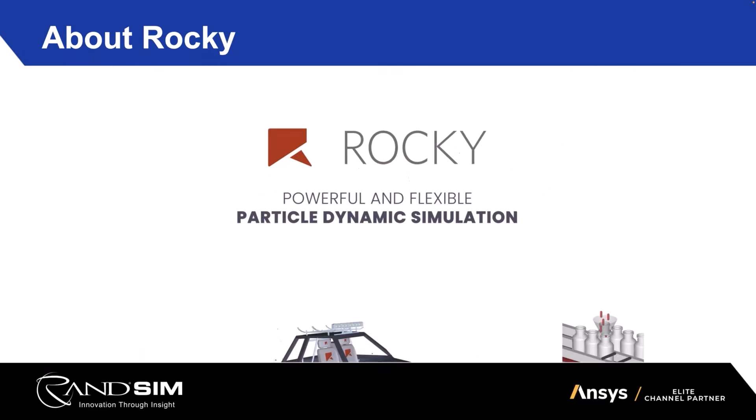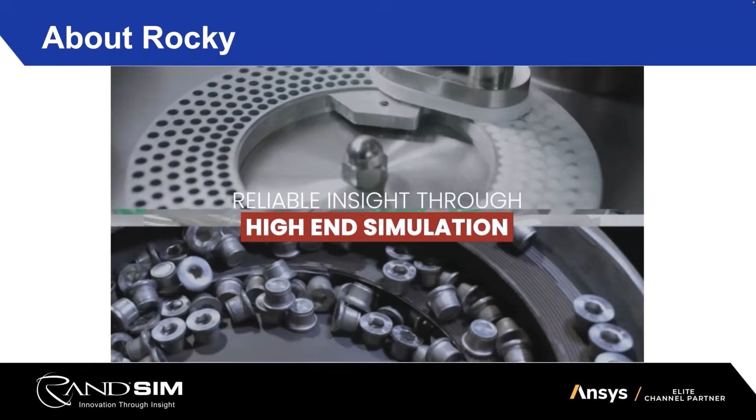Here it is. Particles are everywhere. Design and operation of engineered mechanical systems require accounting of particle dynamics. Particle simulation is key in developing high-quality products while meeting cost, performance, and sustainability concerns. Meet Rocky, the software that is delivering critical process insight for solid handling systems in multiple industries. No matter your industry, use Rocky to accelerate your product development processes.

So in a nutshell, the message we want to convey in this introductory part is that particles are everywhere, and you get impressed by the amount of applications and industries we are touching today, helping model many different problems connected to fluid dynamics, traditional structural mechanics analysis, or electromagnetics, but with more detail as far as particle representation is concerned.

Problems involving different particle shapes, interaction with fluids. For example, on the top left corner, you can see particles coating, like drugs, on agriculture, on healthcare, on floor care, for example a vacuum cleaner, or fluidization, bottling or packaging machines, scrubbers for cleaning rough surfaces, and the list goes on.

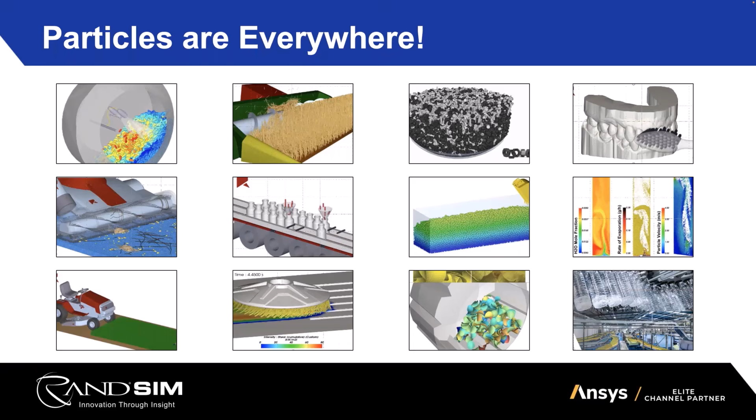So in theory, a lot can be modeled using a discrete tool like Rocky, through what we call particles. But I'm going to get into more detail here to explain how we do that, and how we consider ourselves leaders in this segment.

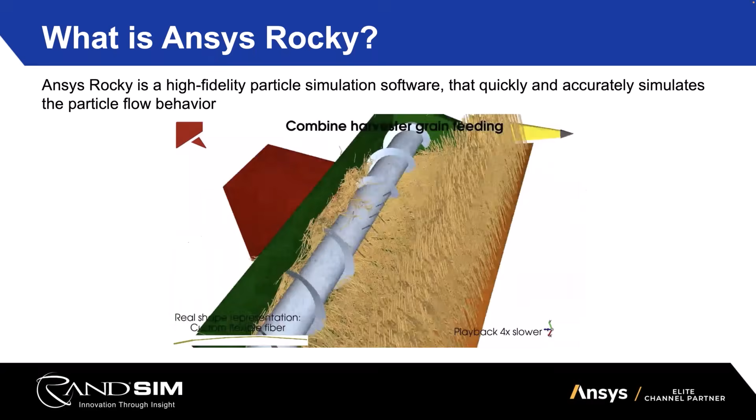Rocky is a high fidelity simulation software that captures and accurately represents particle flow behavior. Here you can see the boundaries of this harvester, but all the grains coming through these feeders, the cutting process, the harvesting process itself are modeled as discrete elements.

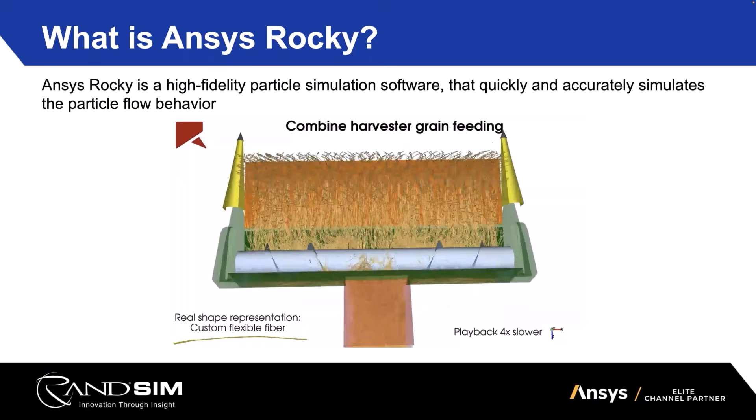Discrete, solid, but not rigid. They can be flexible, they can be three-dimensional. We can handle a lot of them altogether. This is an example of our fiber model, which is like a 1D element with flexibility within each joint.

And we are touching a lot of sectors, from consumer products, agriculture, mining, mineral, food and beverage. These were the traditional ones, but more recently we're moving into batteries, additive manufacturing, renewables or green, and all these environmental issues—they're all related to particle modeling somehow.

If you talk about batteries, for example, we discuss a lot about solid state batteries, which is all about handling material, compressing them, compacting them, and the way you produce and store the energy is related to the compaction, to the density of the material.

So it's all about handling material, and the way you produce it is actually very related to how you're going to finish the life of the equipment—how easy it's going to be to recycle that or not.

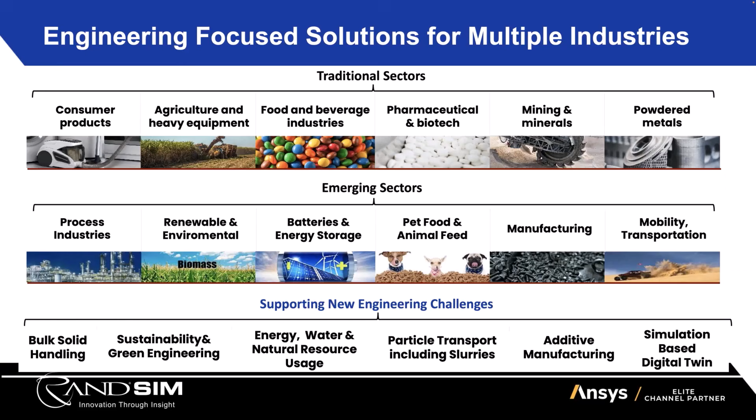Historically, these were problems that people were doing just with spheres, or putting spheres together, taking days or even weeks doing that in an R&D department at a university. With Rocky and the technology we have, you can actually model this in an engineering time frame, which means a couple of hours or a day.

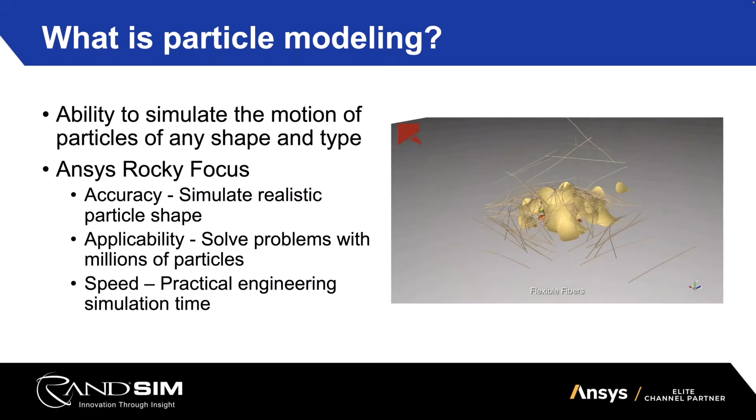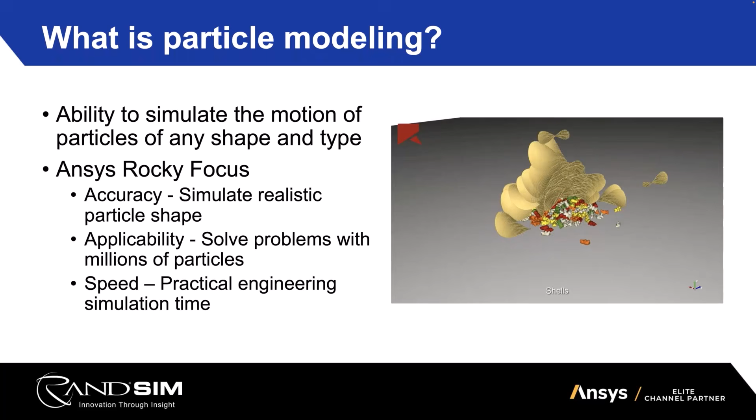You can set up your complex problem and use your computer or desktop, your graphics card, to solve this problem within an engineering time frame. So we're trying to move particle modeling from something used just in academia to actually applying this tool in engineering day by day. This is new, and this is our mission within the industry.

And to do that, we're actually solving a pretty basic equation, Newton's second law of motion. We compute particle and each vertex of this particle's contact in a discrete domain—it doesn't require a mesh. We're not discretizing Navier-Stokes or any other complex equation in a 3D domain.

We actually are solving through use of massive computation particle and particle boundary contact, which is written in Newton's second law of motion.

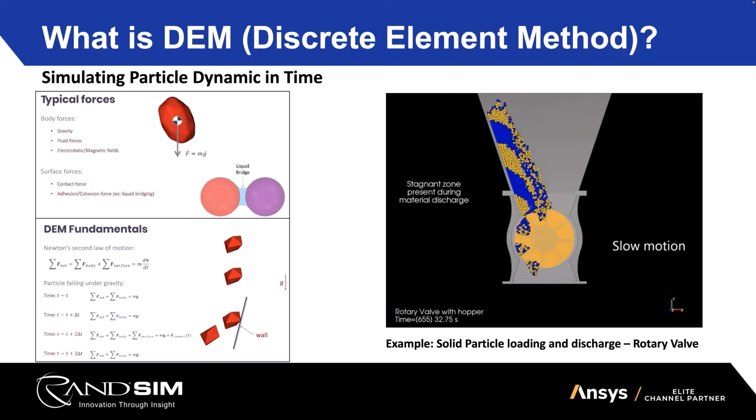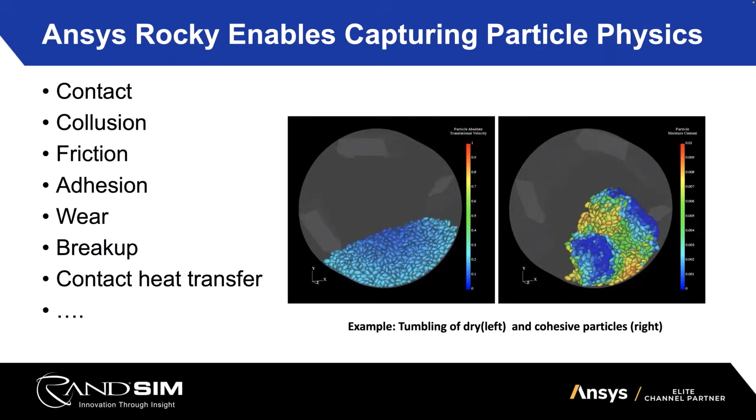So it's very complete in terms of physics that you can add, although we're still solving discrete elements, okay? Rocky brings to the table, and the images and videos presented, complex shapes, okay? We also add particle modeling, breakage modeling, which means that we can break those particles. We can solve those efficiently using the GPU cards, okay?

We integrate this with the Ansys products for coupled CFD analysis and mechanical analysis, electromagnetic analysis. Rocky has some built-in multi-body dynamics capabilities that you can use, to handle everything that is pretty much moving. So you can model these motions and compute their displacement as movement as a reaction of the interaction with the particles.

More recently, we are expanding our discrete models to also comprise not only solids but also fluid mechanics. So we are launching with this new release a smooth particle hydrodynamic solver that is integrated with our solid particle solver, the DEM solver. And this brings a wide variety of industry and applications.

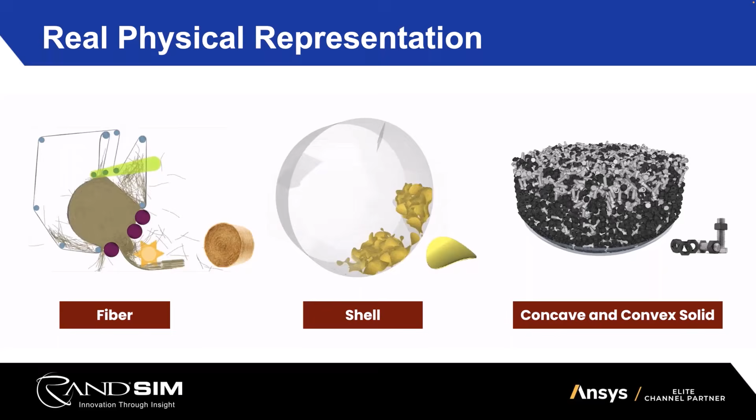And the list of applications, if you just look for particle handling, it's big. It's all about transporting, conveying, crushing, compacting, milling, lifting, mixing, separating particles, okay?

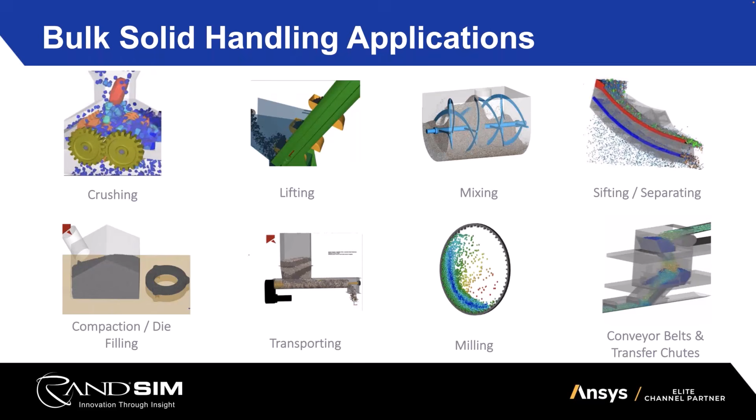And usually we came from traditional fluid mechanics or structural analysis teams and groups. We are just discussing and looking at applications on product design. But Rocky also brings you to look at the production side, because pretty much close to 90% of everything that is around you today, you are touching or looking at on the production side, they were in particulate form, okay, during a certain stage of their production life, okay? So this is a very important topic, but just now we have tools and software that can enable us to model those phenomena. That's the introductory portion, and I move this to my colleague Alex to continue.

My part is going to be much more software application. I'm going to actually run the software in front of you guys and try to demonstrate how that works in 3 different applications. So bear with me as I go through that exercise.

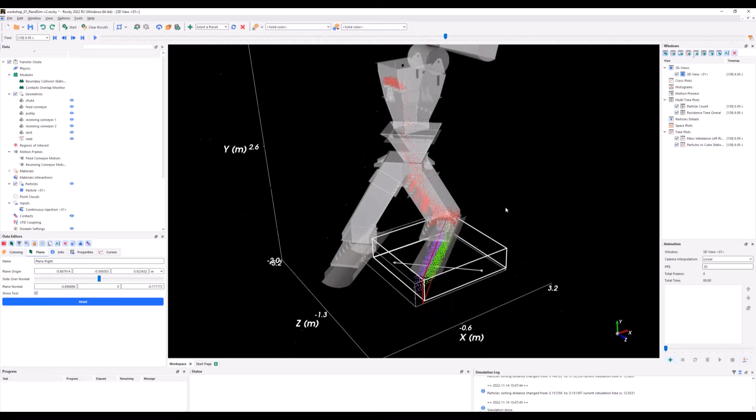All right, fantastic. So the first application I'm going to show you is a transfer chute. Here, the material is represented as spheres for simplification, but really you can go with real shapes if you elect to, which is going to increase computational cost, but also accuracy. And here at the bottom, right, I'm showing you essentially a couple of post-processing we're going to be doing at the end, which is essentially there is an imbalance of particles left, right on that conveyor, and just showing you the kind of post-processing you can do in Rocky. So this is the Rocky interface.

Let me color the particle by residence time, it's going to make for a much better video. Here you can see the simulation results in the center. The particles are essentially just going down the conveyor chute. There is a little shelf here that allows the particle to stay.

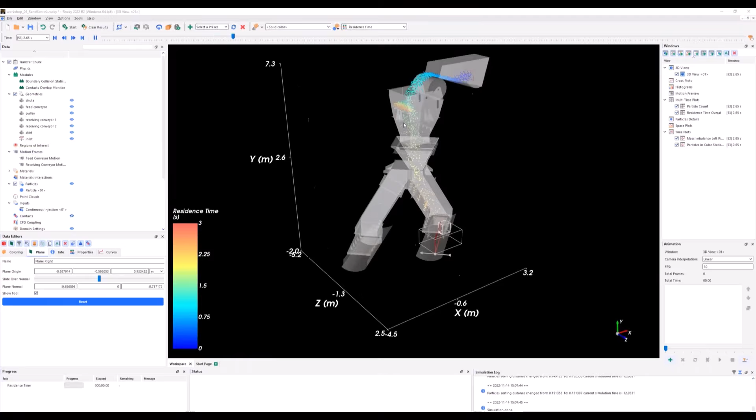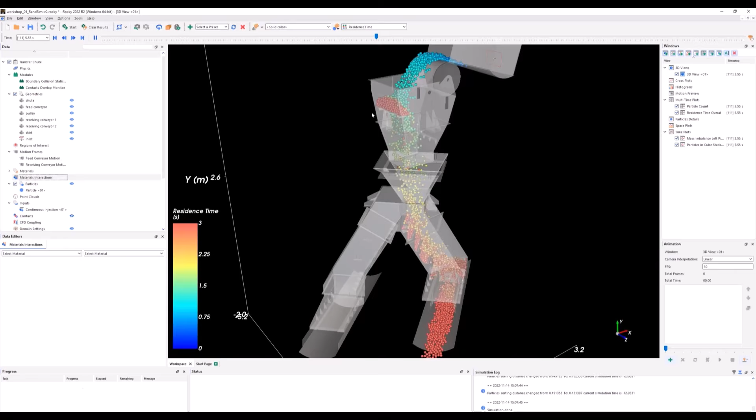This is actually because they probably realized in their initial designs that those particles were hitting the walls here consistently, leading to wear and tear. Wear and tear, by the way, is something that Rocky can actually give you. If you're worried that this metal piece would become worn out over time, Rocky can tell you that.

And that's actually how they decided to put those little shelves a little bit everywhere. So you can color those particles by really so many different things. I'm going to go through the list really fast here. But in this case, residence time is nice.

I also like rotational data, I think it's nice to see as well. The particles don't all rotate in the same direction, of course. Things like that. But you have a lot of different force analysis and things like that you can display as well. So for instance, I'm going to go ahead and start displaying the frequency of impact.

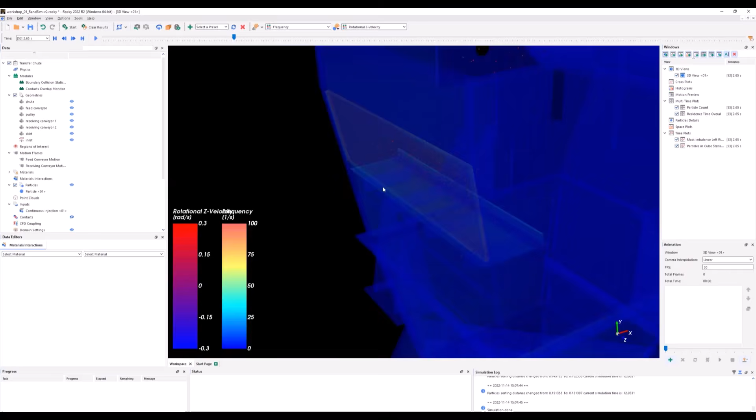And here you can see, this is the highest frequency of impacts of my simulations. I probably have some more here, but I can also display things like the normal stress, and I can hide the particles to make that a little bit simpler. And here you can see it, you have your high stress areas here, and every time you have a shelf.

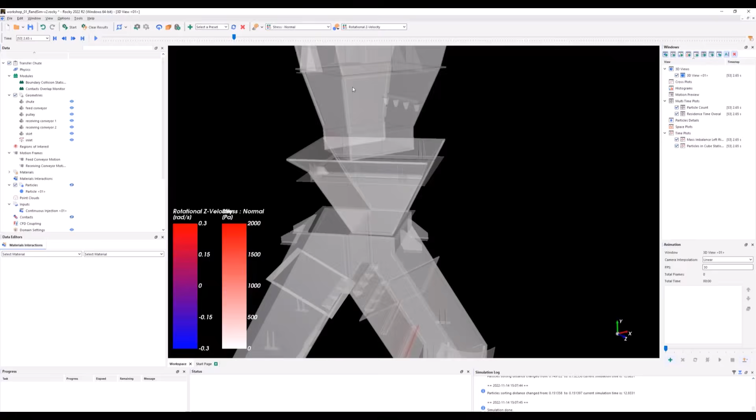However, that's a controlled high stress area, as the particle here that I can show again, they act as a cushion to that metal barrier. And all of that is data you can extract from Rocky, right? So it's really a fantastic design tool, gives you a lot of insight into how it works.

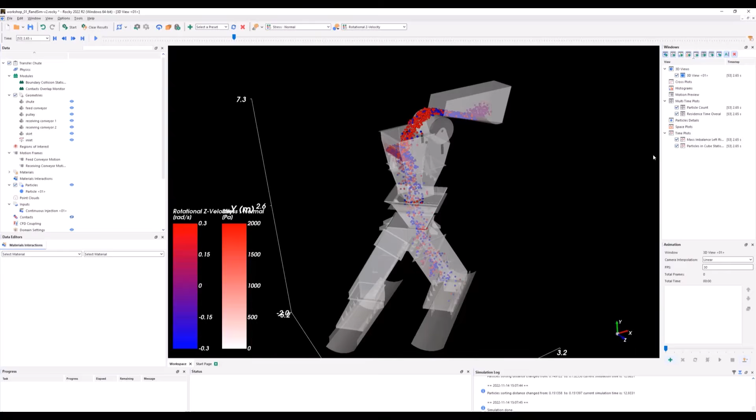So why does it reach an equilibrium? Well, it's because we have all of those particles trapped right here. So how many are trapped? Well, about 900 are trapped.

So then you can do other stuff like residence time of particles, interpreted in a different manner. This is the residence time of particles that leave the domain. No particle leaves the domain in the first 4.5 seconds, so there's no data there. But the first particle that leaves the domain really had a residence time of 4.5 seconds.

I can also plot the average residence time of all particles, not just the ones that leave. That's what I'm plotting here, right? So essentially, you have access to an incredible amount of data, all of this data, and you can do statistical analysis on any of it.

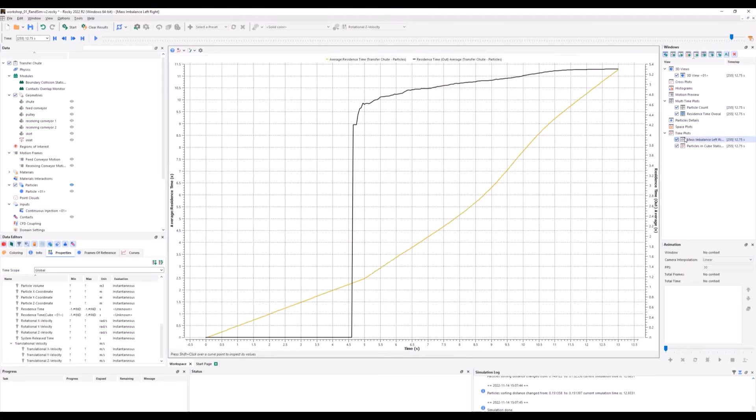So that's how you can create things like this now. So here, this is the mass imbalance left-right. How did I plot that? So what I did first is I created this cube region.

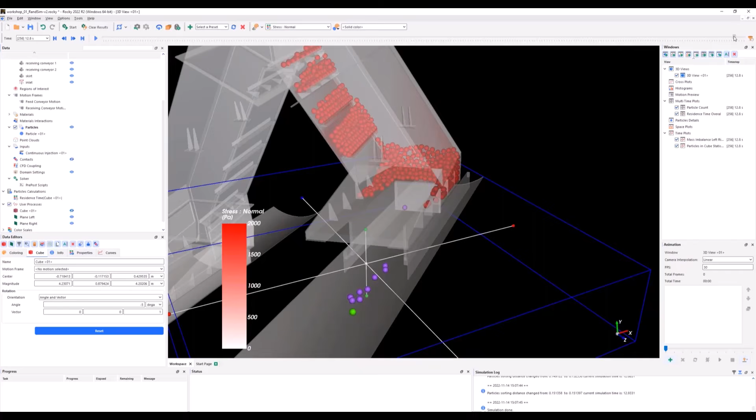This cube region is just a splitter. It will only calculate the particles that are inside of this cube region. Let me go ahead, so that's solid color set here, right? And then I created two planes, one for the left particles and one for the right particles. When I color them differently, that means I can now interrogate all of the purple particles and all of the green particles independently. And that's how I plotted this mass imbalance.

And I can see that in this particular design, there is perhaps not a flaw, but something a designer needs to be aware of, which is there is a lot more particle mass on the right side compared to the left side. That means more wear and tear on the right side. And that can also mean perhaps you want to do a redesign, balance that out, make wear and tear more even, and you're good to go.

All right, I hope all of this makes sense. Let me now show you, so I showed you the software, how to use it, but I haven't really changed anything here, right? I really want to stress this out. Rocky is quite simple to use.

Perhaps the first setup takes a bit of time, but there's no mesh, there's no need for advanced CAD capabilities, nothing like that. And that makes the software quite simple to use.

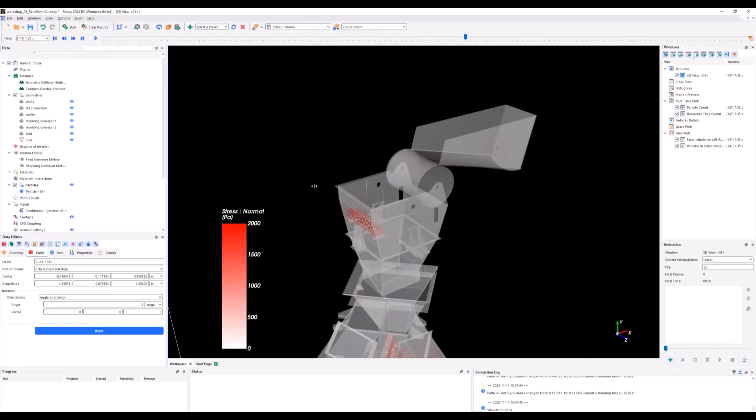Let me show you, for instance, what the quote unquote mesh is. It's essentially, it is just an STL file, meaning you go in your CAD, you don't even clean it up. You output an STL file of the not clean CAD, and that's what you get.

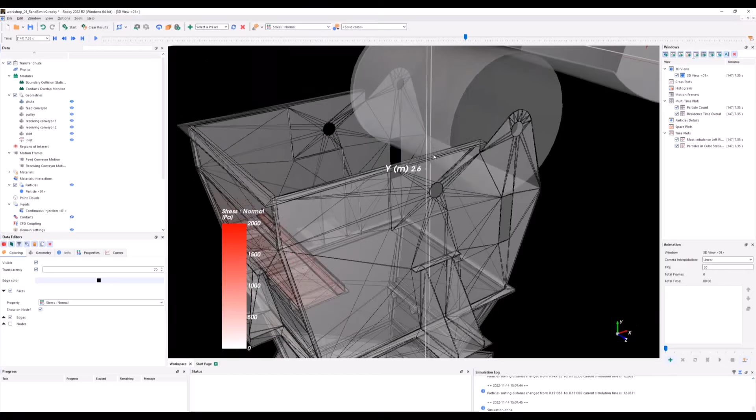And Rocky can use that. There are holes here, like the part missing. There's things that don't match at all. Nothing matches here. It doesn't matter to Rocky. The worst case scenario is one particle leaves the simulation domain through the hole, and it's no big deal. Rocky does not care about it. It just disappears as it exits the simulation domain.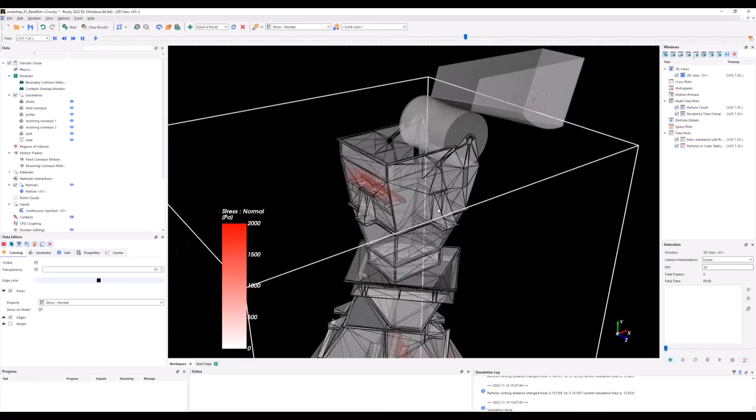And so that means that there's very little CAD cleanup involved, and there's no meshing whatsoever. And that makes Rocky so simple to use when you compare that to things like CFD analysis, which requires absolute perfection in your CAD. If two parts are separated by 2 microns in CFD, you will have trouble. Interfaces in CFD, lots of CAD prep, then you have to mesh, and then you have to simulate. In Rocky, it's pretty much limited CAD prep, STL file, and go to simulation right away.

So that's pretty awesome. And you have also the ability to change things quite simply. So for instance, those particles, right? Right now they're indicated as spherical, but it's so simple for you to go here and just say, no, I don't want a sphere, I want something else. And to just select it and run it. So enough talk, let's actually do it live.

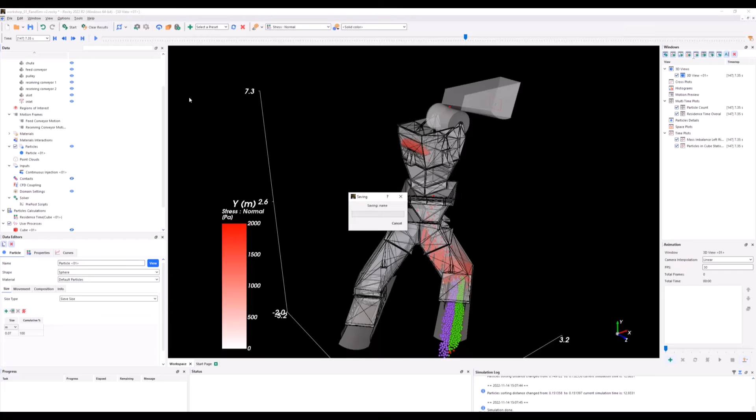So let me go ahead, I'm gonna save this. I'm gonna save it as live, all right? And let's just do a bit of work. I'm gonna pretend I'm a designer. I've learned a lot of things. And what I've learned is I don't like this shelf. I just don't like it. I wanna remove it. And then I don't like those spherical particles. I really would like to have more realistic particles for my application. And I'm gonna show you how much time it takes you to do that live and then to simulate it. All right, fantastic.

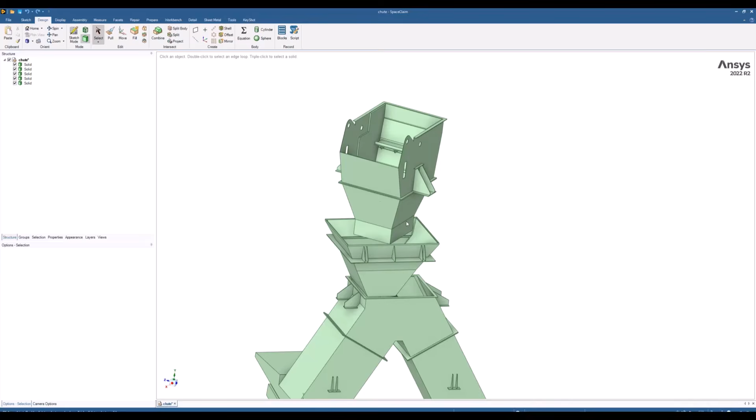So the first thing you wanna do is you go in CAD and don't clean it up. Don't lose your time. There's no need for it. And what we're going to do is some modification. Here, I just want to remove that shelf. So I'm going to go here. I'm in the CAD. Okay, that's a nice angle. Go in here, select the shelf, delete it, and then File, Save As, STL file, and Chute V2.

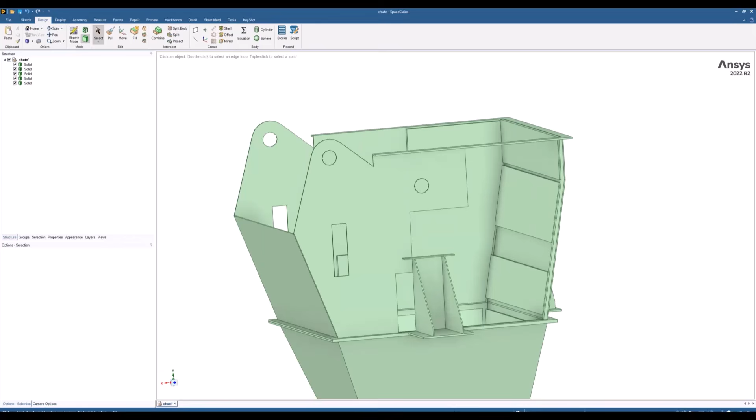By the way, I've done that in SpaceClaim, which is Ansys CAD tools. You're very welcome to do that in SolidWorks or CATIA or whatever your CAD tool is. There's no need to go to SpaceClaim here. Any CAD software that can output an STL is fine. So now I have this new STL file. I'm gonna go here, see that's my geometry input. Those are the CADs that I gave to the software.

So I'm gonna go here, take my geometry and just say, all right, where is my geometry? I'm gonna load a new file. My new chute. Yeah, I think it was created in meters. Oh, and now let me rotate around and you see that shelf that we had before, it is gone. So that's the new CAD part. Do I have anything else to do? No, I do not. This is it. The geometry has been changed. I'm ready to run. But I told you I wanted to change a little bit more stuff.

So let's go into particles, you know, those spherical particles, great approximation. Everything runs very fast. But let me change things a bit. All right, so I'm gonna do some polyhedrons here. Do I have something else that's funny? Yeah, polyhedron is fine. And what I'm gonna do is large polyhedrons at the start, and then smaller polyhedrons here. All right, and let's see, I think that should run. Let me go ahead and try this out.

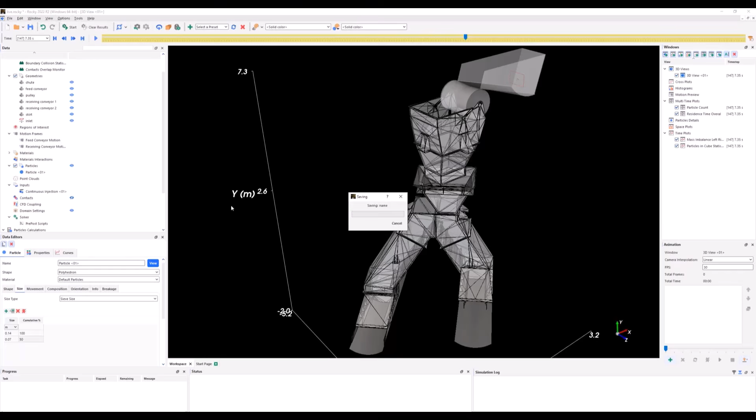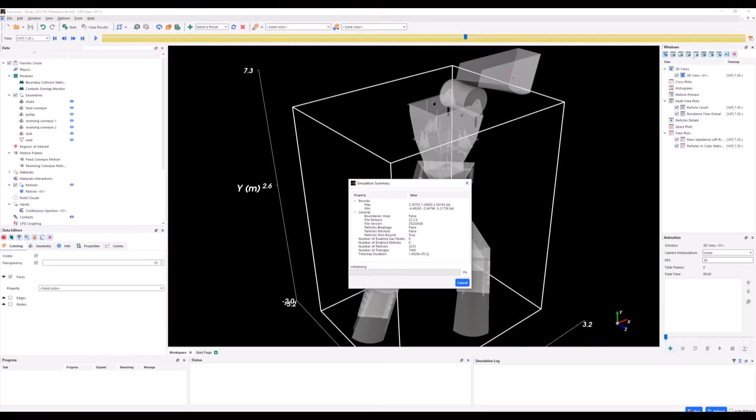I also don't want you to see the STL file, so let me remove the edges. There we go. And let me rerun this. All right, I'm saving the file. I'm running the file. Yeah, that went through. And now another thing, this really blew my mind. You can look at the results live. This is what we're doing right now.

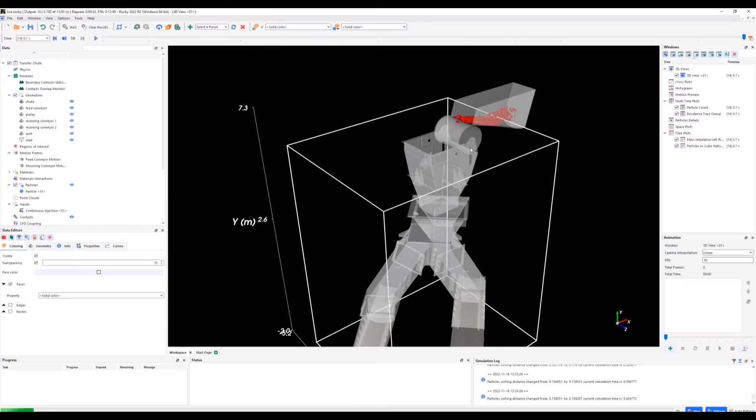This is, by the way, computing on a laptop that's about 3 years old. I have an 8th generation, well, Intel is at generation 13 right now. So I'm 5 generations behind Intel, solving on 5 cores. So I'm not using state-of-the-art machinery here. I'm using a standard piece of equipment, the relatively old laptop that everybody can use, and I'm running this live in front of you, and I can interrogate the results as this runs.

Something I like to do here is show particle mass. This really highlights the fact that I have large particles and small particles in this simulation.

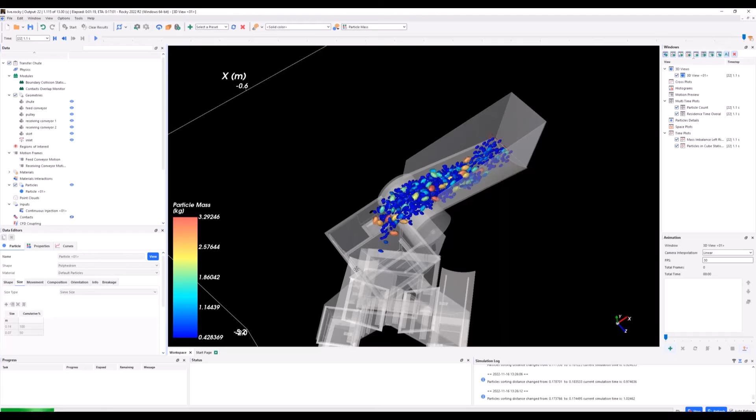And again, all I have to do is go here, fill out that table, change the shape of the particles. You can import custom particles too, right? So if you want to create your specific shape in CAD and then import that, you can too. So you don't have to use pre-existing particle shapes or anything like that. And again, I changed the shape here of the chute itself, and I'm ready to run, right?

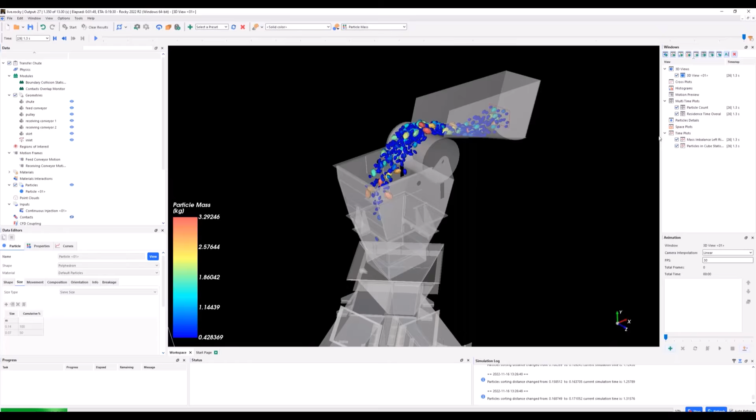So it took what, 3 minutes, 4 minutes, and the simulation time for this is shown here on my really old laptop. It's expected to be about 18 minutes, right? So that gives you an idea. This is a pretty simple case, but that gives you an idea of, hey, I have a design. I'm able to understand it much better thanks to Rocky. I'm able to change it in minutes. I'm able to change the particles, and I can get advanced post-processing with respect to imbalance, wear and tear, stresses, etc. All right, so I hope this was super helpful for everybody.

I'm gonna go ahead and open my second example for today, okay? So I go here, open a new project, and my second example is gonna be the tablet coater. So I'm opening that. The tablet coater is really interesting to me because I had no clue how Rocky was able to give the coating, because in my mind I was thinking it doesn't simulate the coating particles themselves. So how does that work, right?

So I did this. By the way, all of what I'm showing today is workshops. All of those workshops are very well guided, and I use those guided workshops to achieve what I'm showing you guys today. So it's really, not simple is not the word, but if you compare that to FEA and CFD, those are not the same software in terms of learning curve necessary to know them.

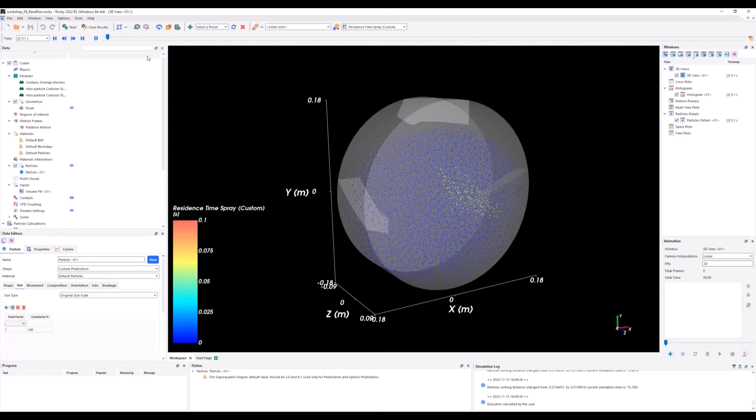I'm a CFD engineer. I picked this up 3 months ago, and I've used it every so often, and I'm able to go in Rocky's website, find workshops. They have 25 different workshops, something like that. It's incredibly diverse, and create those cases. So here, what I'm showing today is a coating machine. So it's a drum. Funny enough, right? You recognize this shape. Marcus showed it in a drying application. Drying and coating are very similar applications.

For drying, often you want to couple that with CFD because you need the moisture content of the air. For coating, you don't have to. I'm going to show you a little bit better how you can simulate coating today. So the first thing you have to do is the rotation motion. So what you do here is you import your geometry. That's the drum. You give that geometry a motion. Let me click on it.

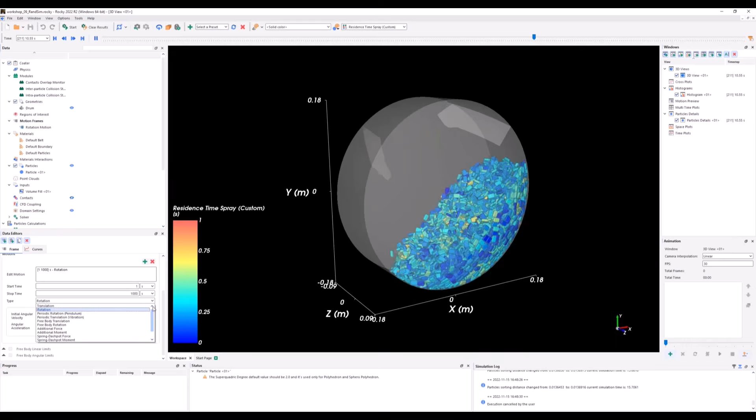It's a rotation at this speed around the, I don't see the axis, but it should be written somewhere. But anyway, it's around the Z axis. So it's a rotation around the Z axis here. By the way, look at this. Those are all the predefined motions if you don't want to enter your custom motions. So you can do translation, rotation, periodic vibration, free body, spring. And you can nest them within each other. So you can have a spring that's rotating. So lots of different motions.

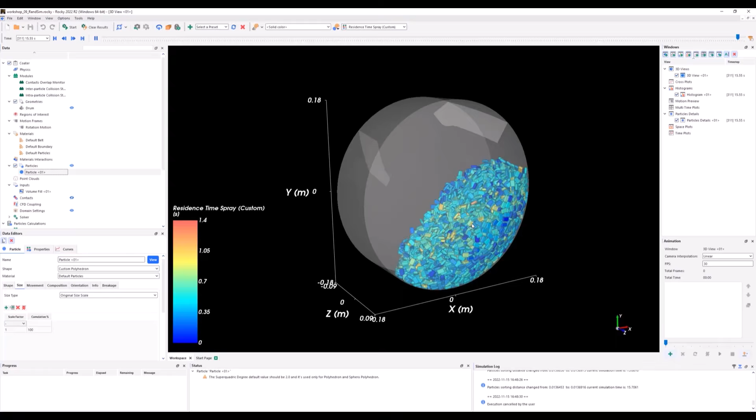So here you imported just a geometry. You specify the motion, specify obviously the materials, bring in the particles. So that's really interesting, right? This one is a custom particle, meaning that particle is not default. It doesn't exist in Rocky. We created it in CAD and we imported that particle inside the software. And then you can also see, right, that we did a volume fill.

The last time around for the transfer chute, the particles were coming through a plane at a predefined rate. So that was what we call a continuous injection. But this is a volume fill. So it's just a bunch of particles at the start. You indicate the mass of particles and their location, just a bunch, and you let the simulation go. So it's very simple to indicate to the software.

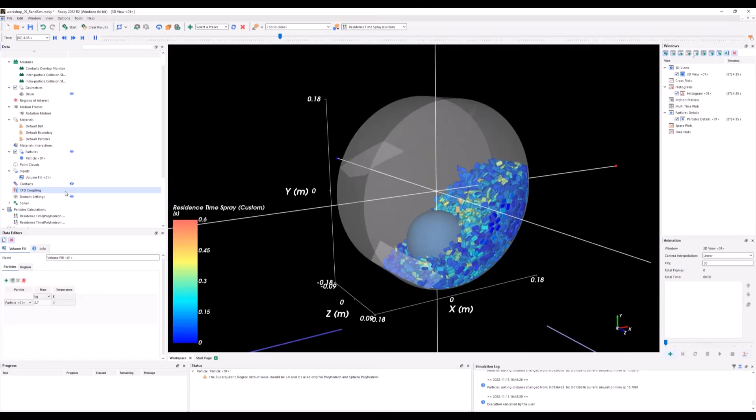And then you can also do another type, which is custom fill, where you indicate specifically where each particle goes, at what time they appear, etc. So lots of different ways to bring the particles inside your simulation. But by and large, why I go through that is just because that's all you have to do. Import your geometry, define your motions, define your material, define your particle. Where are your particles coming from? This is it, guys. There's nothing hidden here. That's it.

Again, simple is not the word. Simulation can always be as complex as you want to make it. But what I'm saying is, it's not going to take you months to have your first simulation results. It's going to take you days, no more than that. And from there, you get smarter, you get better, you make more advanced post-processing, and you get more useful data. But unlike CFD, it's not going to take you months.

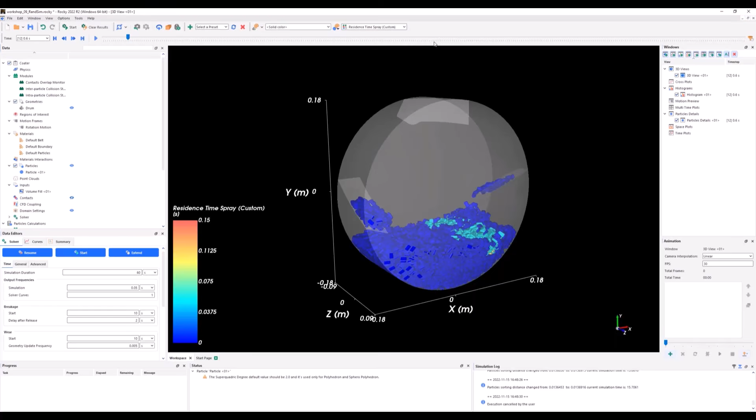It's also not going to take a giant, enormous machine because I'm running this on my laptop. I'll bet this one on my laptop was time-consuming. I ran that on my cluster instead, 30 cores, about 1 hour on 30 cores. So that's the kind of simulation time for this one, which was quite complex.

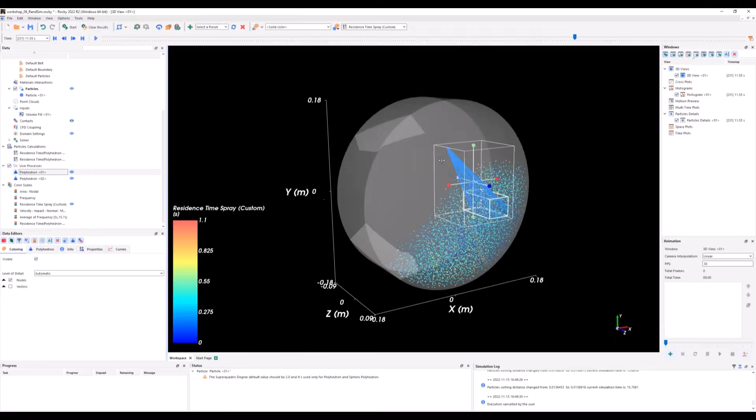Now, let me tell you why this is actually a coating application. So here what I'm showing, the blue color means that those are particles that are not well coated. The yellow colors are particles that are coated well or more. And essentially what we did as engineers is we brought in those polyhedra, again, not just CAD shapes, right? And it's a volume of space where we expect the particles for coating to be. So it's just a volume of space. We're not doing any simulation here. It's just post-processing. But we establish a volume of space where we say, we expect that a particle in that space is being coated, okay?

And what we say then is we can compute the residence time of the particle in that space. So that's what I have been doing here. It's the residence time, not of the particle in the drum. It's how much time a specific particle has spent in any of those cones. And that is how I can color that. So obviously you can see, right, this here is about 15 seconds, and you can see I have tremendous disparity in the coating of my particles. So obviously I need a couple of things. I need to run a lot longer, or I can run maybe at a different speed.

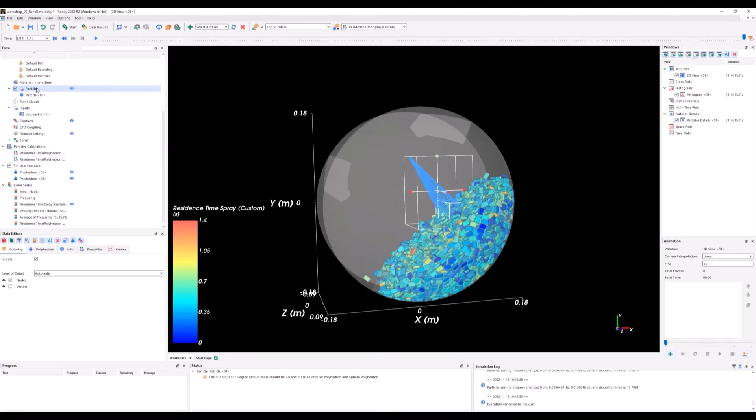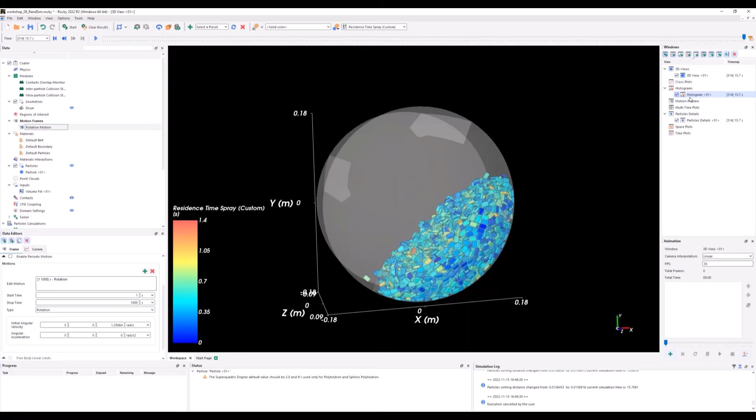How would that be? Running at a different speed, I would go here, motion, change the speed, and relaunch. So 5 seconds of engineering, 1 hour of running on 30 cores, and you have your answer. Does it work better at faster speed? Maybe you can run for longer, meaning instead of 15 seconds of physical time, maybe 5 minutes is better. Run that 5 minutes if you elect to. Any way you want. You can maybe change the drum shape, etc. All of this can be done relatively simply, right? And it can indicate to you, am I getting better or am I getting worse? What do I need to do to better coat?

I like this histogram, which is a new post-processing I haven't shown you before. This histogram is showing you essentially the residence time in the spray. So that means that if you're on the left, you don't have a lot of coating. So at the start of the simulation, the particles don't have any coating at all. Almost all of them are here. In the middle of the simulation, we can see that a lot of the particles have moved toward the right. I still have those two bars, with 600 and 700 particles here that don't have a lot of coating.

By the time I'm at 15 seconds, we can see that particles with almost no coating whatsoever start to be very few, maybe only 100. And then particles with a medium amount of coating, 500, and then the particles with a decent amount of coating are all the other ones. So at any rate, what I'm trying to show here again was the ability to do awesome post-processing in Rocky, really understand the data, really understand what matters, what does not matter.

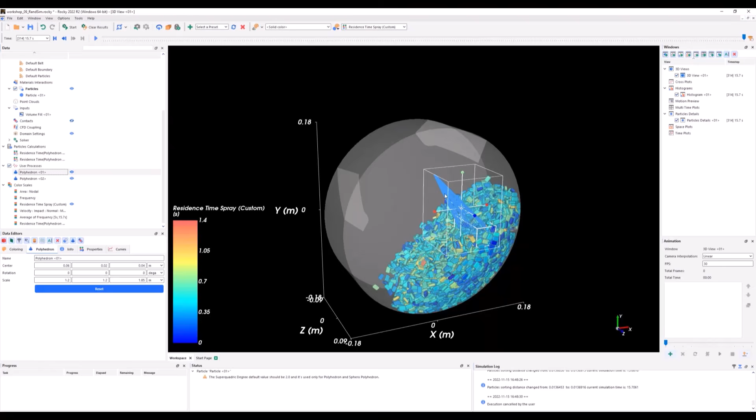By the way, another type of thing you can do very, very simply. I mentioned changing the drum, changing the rotational speed, changing the time the drum is rotating. Check this out. Those spray geometries can be changed here. Super simple, meaning you can scale them up, down, you can make them longer, larger, different angles, whatever takes your fancy, just by changing the numbers here. So it's one geometric shape that's deformed.

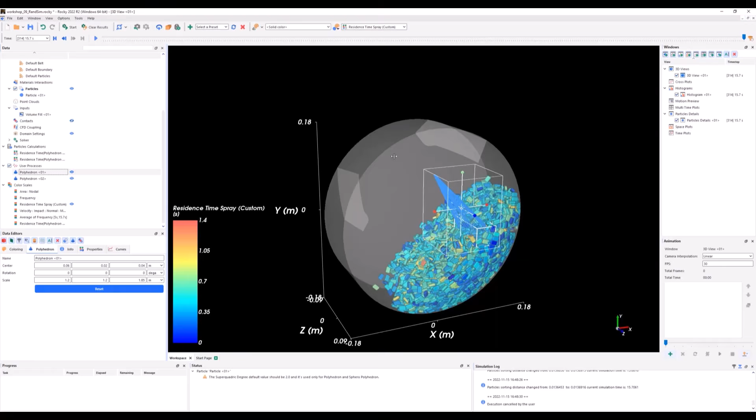And that's all post-processing again, right? So you can change your sprays and try to find a spray that maybe works better for you. And this one actually will not require a rerun. So really just a lot of awesome stuff you can do just here for that particular simulation. The last thing here, and that's pretty cool because that's yet another type of post-processing I haven't shown you before.

This is the frequency of impact on a particle. And what that tells me is that all of the angles, all of the corners, they are the ones that get all of the impact. And so that tells me on this particular particle that most likely these things are going to get rounded big time. If I'm getting impact at a frequency of 15 hertz, that's going to be thousands of impacts by the time I'm done rotating this. That means all of this is going to be rounded.

Maybe that doesn't matter for that particular application, but maybe your particle needs to stay sharp. How do you do that if you don't have a good idea of how many times it's going to impact, of the stresses of those impacts, the velocities of these impacts? All of that is data you need if your particle should not be rounded, right? So at any rate, Rocky can give you all of this data, visualize it very simply, and allow you to do some modification and rerun quickly.

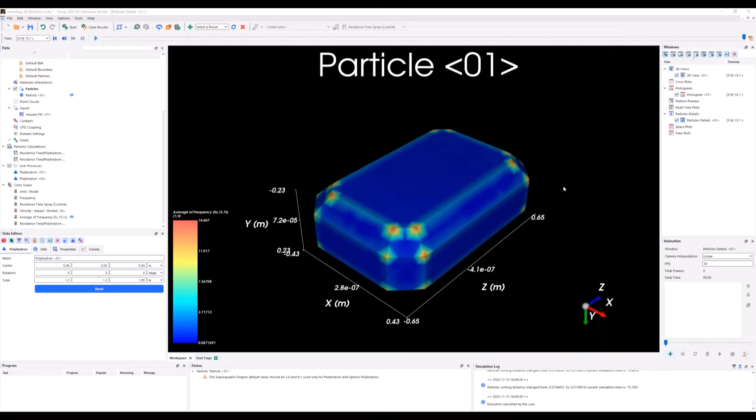Let me go to my third and last application example here. And this one I like so much because as an engineer, I am almost entirely convinced that you cannot do that experimentally. I am sure we have experimental people in this audience, maybe some have even tried, but I don't see a way to be successful experimentally here. This is a bottling application. Again, I'm showing you the variety of particles that can be modeled with Rocky.

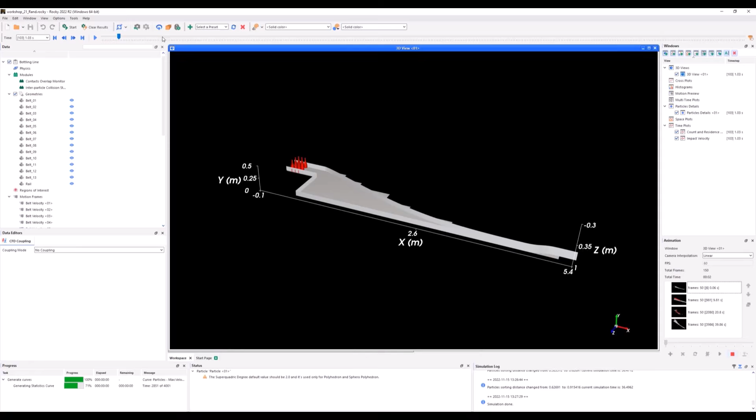So we created those bottles in CAD, right? They're not part of Rocky. We created them in CAD and imported them. And the goal here is to make those particles single line. So I'm gonna go ahead and play. I think I have a video that I created. Yeah, let me play that video. Is it computing? Okay, let's give that a second. Yeah, I think it's computing the data.

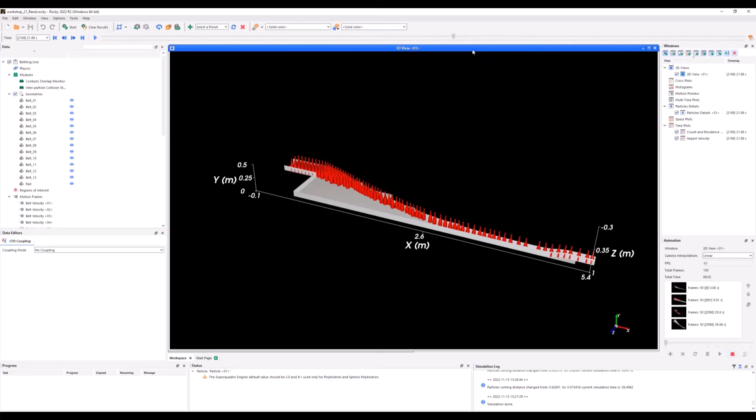So let's just go. So you can see here the bottles are moving and becoming single file as they move through this, right? And essentially, as a designer, what you want to make sure is that no bottle can fall. That's the most important. If a bottle falls, you're in such trouble. The shocks are not too hard because you don't want to damage the bottles, and they are becoming single line, and that is fast enough. So that's a lot of things you're trying to work with, right?

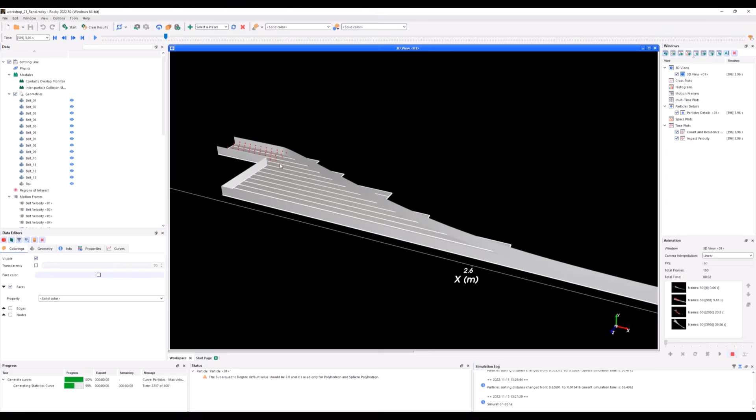And you have, I kid you not, 13 different belts, all of which can be at different speeds. So I'm taking just a second here. How are you going to optimize that system with experiment? Are you going to test 15 different bottles, hundreds of different speeds for the 13 belts, and a different CAD shape for this S shape? It's impossible. It's way too long.

And the big problem here is if you're wrong and you put that in an assembly line and a bottle falls every so often, what do you do? You have to stop the assembly line. You have to stop the entirety of the production. And now you have to find the problem on the spot. This is not a good place to be, guys. Don't do that. This is a 15-minute simulation, 20 minutes on a laptop with Rocky.

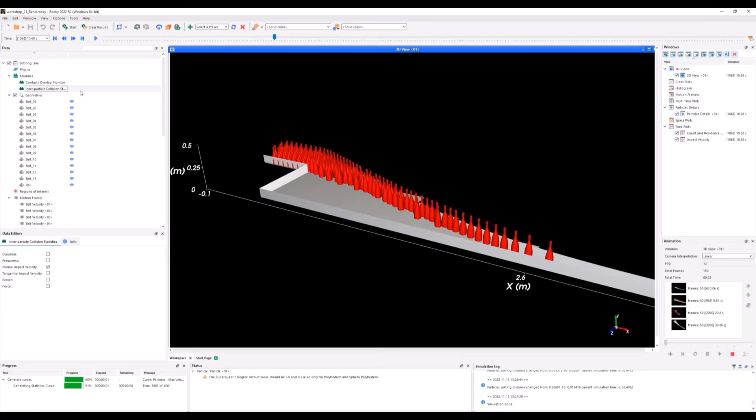And here is how you set it up. Again, your physics, which is essentially what's the direction of my gravity. The rest of the physics is default. Modules, just a way to record more data. You import your geometries. You give your motions. Here, all of the motions are simple translations. You define your materials, you import your particle, and that's it. You are ready to solve.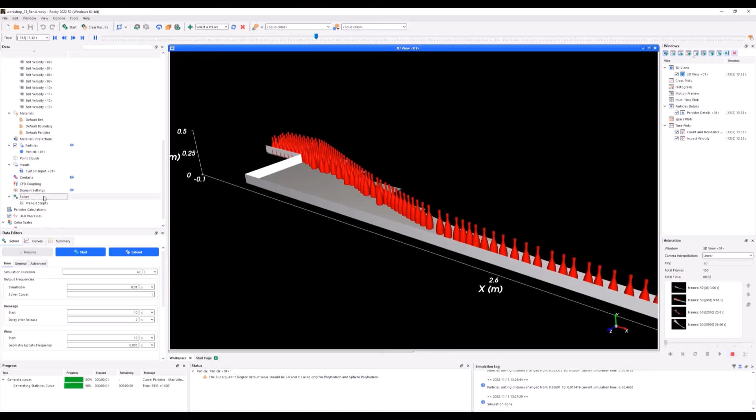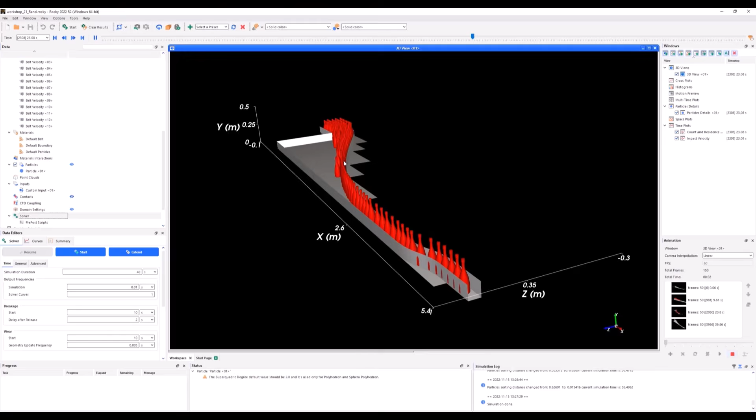So I hit a little bit of difficulty here, but in the big lines, this is what it is. There is not more than this to it. So don't try to do that on the field with stopping an assembly line as a possibility. Just use simulation software.

Now let me show you a bit more of what can be done with Rocky in terms of advanced post-processing here. That's going to help you understand if your design is going to work or not. So obviously the first thing here is we can verify that we're not expecting to have any bottle that falls, right? This was very graphical. There's no problem there, but we can do more advanced stuff.

So for instance here, I'm showing two drawings. One is the residence time. Okay, that's pretty simple. We can see, sorry, the particle count, my apologies.

So we can see at the start there's no particles. Then there's more and more particles as they come in from the left. Then the number of particles is stable, and then it goes down as they leave from the right. And at the end, I have 0 particles. Great, all of my particles left. Good, doesn't really have a lot of added value here.

The next graph I'm showing you is the residence time in blue. As the particles enter, they obviously have a residence time of 0, and then it takes them about 13.5 seconds to go through my system. So that's good information, right? Because now if I want things to go faster, well, my target is to beat the 13.5 seconds. But in this particular case, 13.5 seconds is what I achieved with my design.

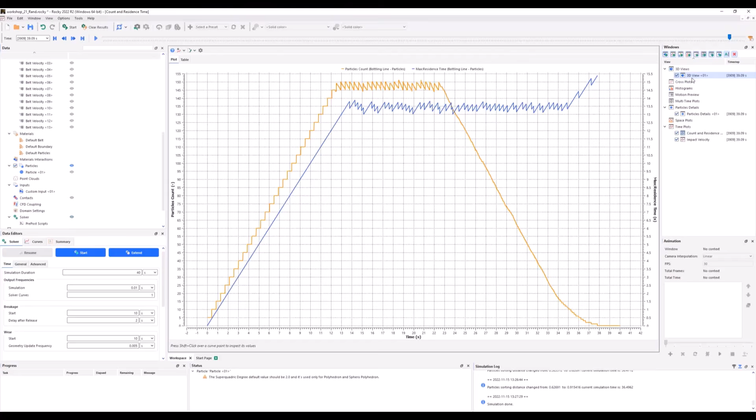But look here at the end, I can see there's a couple of particles that took more time to exit, and maybe that's of interest to me. So I'm gonna go back and check why I have particles at the end that seem to be taking more time. Okay, interesting, and now there you go. Do you see those particles, how far apart they are? That's why those are the particles that took the most time to exit.

And why? Well, that's because when the particles are stacked like this, they enter those left belts that are much faster, and so that's going to make them move faster toward the right. But those last few particles, they remain on this S curve, so they are always on the slowest belt that they can have, and that's why they essentially lag a bit behind.

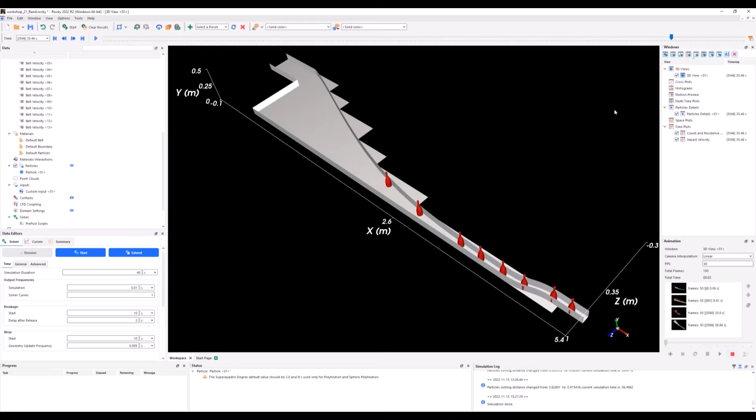So maybe that doesn't matter. Maybe that matters to you a lot, because behind this, most likely you have a wheel that grabs all of those bottles or something like that. And if that wheel is not expecting to have bottles coming far apart, then what do you do? So you have to be aware that when you feed that system constantly, you have consistent bottle alignment. When you do not feed that system constantly, you do not have consistent bottle alignment, with tremendous spacing change.

That's not something that is easy to see on the line or understand. But in simulation, piece of cake, right? All right, so now let me go to the next level of data analysis. Here, I am showing you the maximum impact velocity. That's super important. This is glass material we have here. We want to know, is it going to be damaged or not?

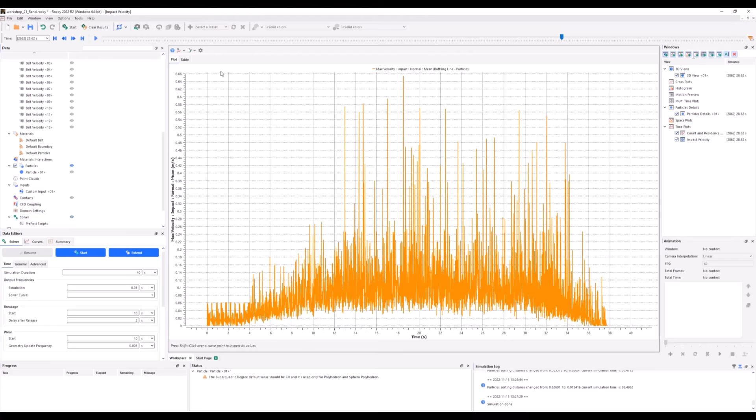And so I can see here, I click on Shift on my keyboard so I can see, at something like 15 and a half seconds, I have a pretty large impact here. I can actually go ahead and check that table here, which is the data. So 15 and a half seconds, bear with me. I'm terrible at this. I think this impact was about 0.6. So let's go and find it.

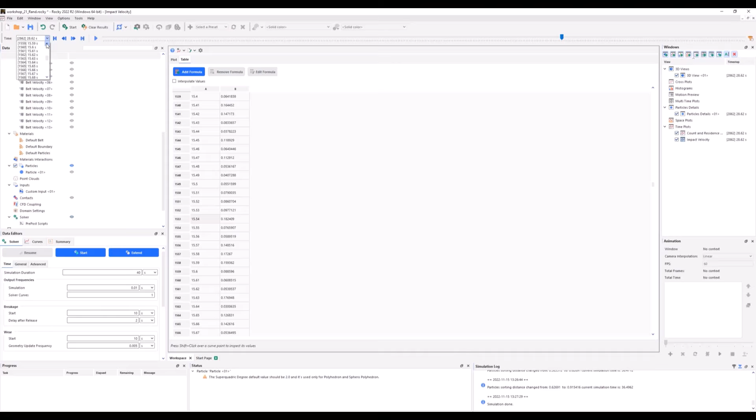I have a big impact at 0.2 here. Maybe I can go and check it out. So I have a big impact at 0.2 at 15.54. So let me go to 15.54. All right, bear with me, guys. Fantastic. I show this. And now I'm going to color this by impact. And there we go. So I had an impact here. I had an impact here.

Now, if I go a bit further, oh, did you see that? I had a large impact here on the S. Let me just go ahead. More impact on the S. I'm seeing a lot of impacts in this area. And that's normal, right? This is the fastest velocity that the bottle achieves with the fastest belt, and they have this S curve. And so that means this is where the most impact occurs.

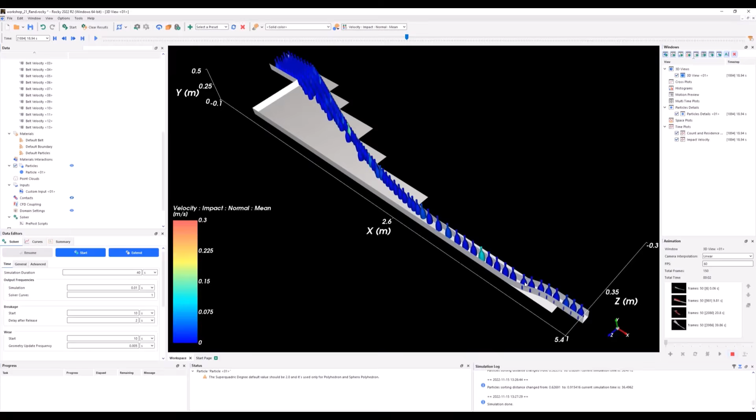And Rocky is essentially able to tell you, yep, those are the impacts, those are the impact loads, forces. And so from there, you can know how your system is gonna react. Is your bottle gonna be okay? Is it not? Now, imagine you have 5, 6 different bottle shapes that may go here. If you are in the experimental realm, you have to test them all. Maybe they have different fill rates. Well, you have to test that too.

If you're in Rocky, testing a different bottle is as simple as going here and just importing a new particle. That's it. You import one file and you have a new particle. If you have different fill content, that's here. You see here, I have a center of mass that I can adjust. Let me actually go ahead and show that particle.

That's the particle right here. In this case, the orange point is the geometrical center of mass. But the blue dot below is the adjusted center of mass.

As an engineer, you have control over the fill rate of that bottle. You can move that up and down. So not only can you test different bottle shapes, you can also test different fill rates. Maybe they have more glass at the bottom, so the center of mass is lower, right? And that's just a small change.

Relaunch your simulation, wait about an hour, actually 20 minutes on my laptop, and you would have the answer as to how that system performs.

All right, so that concludes the demonstration. I'm just going to take one minute, no more, to point out that I have shown you guys three simulations that just live inside of Rocky, but there's more you can do, right?

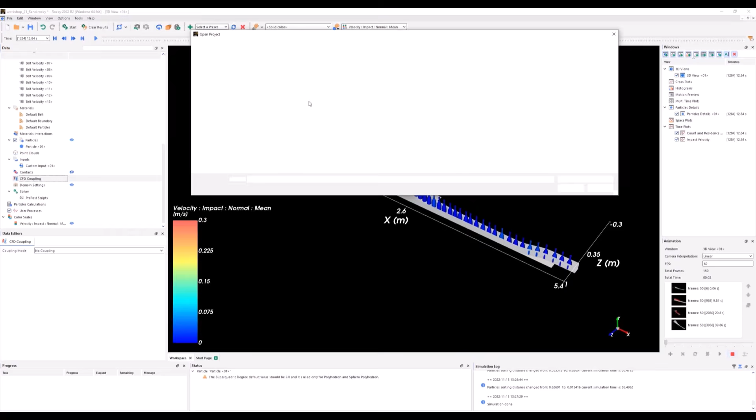Let me open this one. Perfect, the tablet coater. Let's say that you have the tablet coater like before, but now instead of the coating, you're interested in how they're drying, right? So you have dry air coming in, humid air leaving.

How is that air going to absorb the humidity and how is it going to move inside the drum? That's Fluent. So you would simulate that in Fluent. You don't simulate the particle, you simulate the drum in Fluent with dry air coming in.

Once this is set up, it's a pretty simple setup, right? Just one drum, no particles, dry air coming in. Once you have this simulation file, you set it up in Rocky, exactly like this. You go here and you say two-way coupling with Fluent.

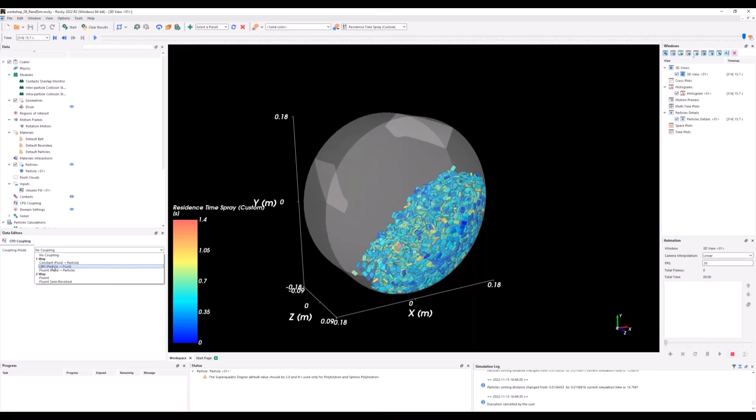And what this is going to do now is that the flow field information is going to come from Fluent. The particle information is going to come from Rocky. And then they talk to each other.

That means the flow field is going to know where the particles are. Rocky is going to tell Fluent, this is where I have particles, please create obstructions and pressure drops. And Fluent is going to say, okay, I created those pressure drops. Here is my flow field, flow velocity.

Here is my flow temperatures. Here is my relative humidity. And then Rocky is going to say, oh, this is the kind of velocity, temperature, and relative humidity I have around these particles here. Then this is my drying rate, etc., etc. And those two softwares are going to communicate until you have a nice drying curve for your particles.

Or it can be forces that you're interested in. So for instance, here, obviously the motion of the particles is due to aerodynamic forces. So you need Fluent to calculate where the flow is going, and Rocky to calculate where the particles are going. And when they talk to each other, you can do fluidized beds, you can do lots of things.

Here, it's a coupling with FEA. That means Rocky can calculate the force on the structure, and it can do limited FEA analysis. But you can send all of those forces to mechanical, Ansys Mechanical, and then you can have the full power of a full-fledged flagship FEA software to in detail measure stresses, deformation, whatever you fancy.

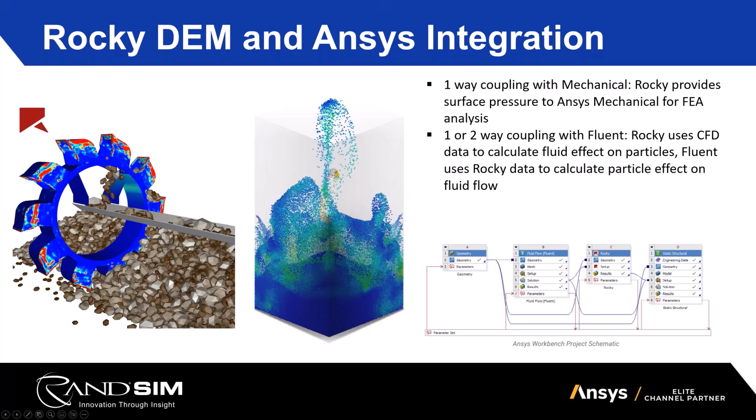And finally, smooth particle hydrodynamics. Marcus talked about this for a second, so you're a little bit aware of it. But essentially, sometimes it's better to have Fluent coupled with Rocky, but it can be computationally costly. And so there are times where you just don't want to go there.

You don't want to pay the computational cost to have Fluent running in the background. You're just interested in perhaps a simpler model. And that's when smooth particle hydrodynamics, SPH, is going to come in. And so that's what's going to allow you to do simulation with both water and particle if you want, for a variety of applications.

I absolutely love this image because those are like waves that are happening in this room. I just think it's so pretty. And by the way, that would be unsteady and you would be able to watch those videos live and simulate this kind of physics much faster than you would with a full-fledged CFD software. Perhaps not as accurate, but certainly powerful enough that you can find a lot of engineering applications for it.

And that's pretty much it. So a couple of takeaways. Let me take my breath. I've been talking for a while now, but a couple of takeaways.

Rocky is versatile. Have you seen the number of applications we've shown you in an hour? You can do mining, farming, pharmaceutical, heavy equipment, so many designs, so many particles you can do. It's incredible the amount of different physics you can have in there.

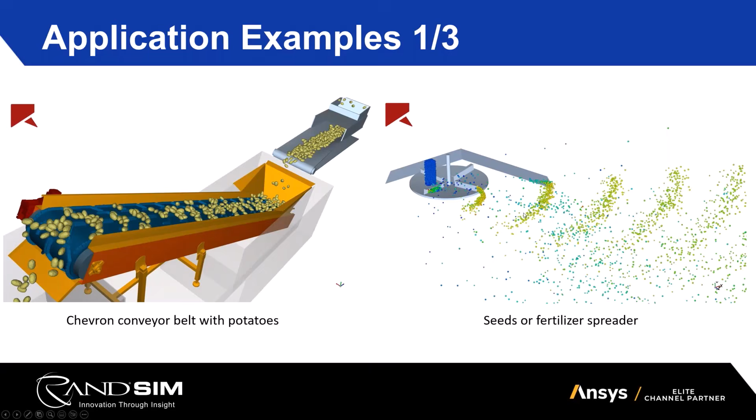You can use these marketing images not only to make your system better, but to tell your clients, no, I'm not telling you I am the best. I am showing you that my system is the best. Here is how it looks in action. Here is the improvement we have done since we've used simulation, etc.

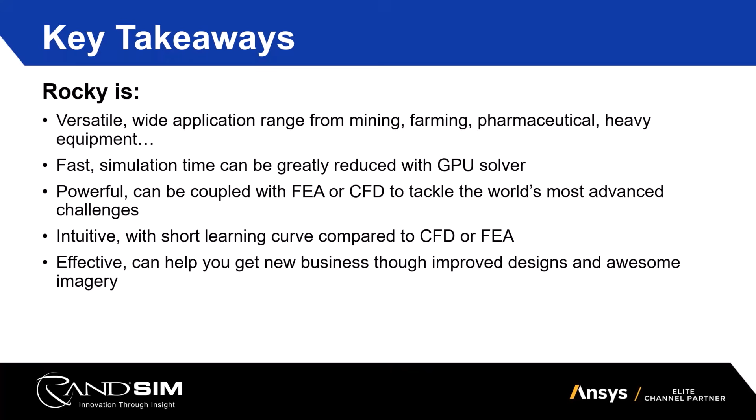So you can use Rocky, sure, to make your machine better, but it's very important to also focus on the sales. You can also use Rocky to sell more machines because you now have the ability to tell a bottling assembly line, hey, look, we tested our single filler on 20 different bottles, 60 different fill rates, 5 different bottom shapes, and they all worked fine. You can show that to your clients, and before you just couldn't. So that can separate you from the competition as well.